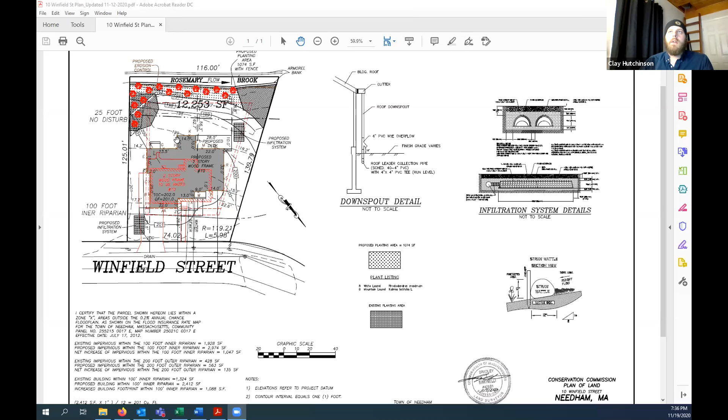So what was revised from the last iteration was simply that the addition here was kind of bumped out. It only came 3/4 of the way to the edge of the deck, and they made it flush with the deck, and brought a little wrap around up the stairs to the deck on the side. Aside from that, the same plantings, the same stormwater units, the same footprint — aside from that change it's all the same.

I'm just noticing one thing we try not to have happen is proposed grading sheeting onto an abutting property. So can we include, and the commissioners can discuss this, a condition of approval saying that the proposed grades, particularly on the north side, will not sheet flow onto the abutting property? It's showing right now that it kind of does, but I think there's enough room to fix that. We can have them submit a revised plan before we issue the order, and I can send it to you to review.

Okay, Rob, does that make sense to you? Yes, I don't really see that it's shedding onto my neighbor's property, because the property line on the north side is more or less a swale, but there's a fence going down towards the brook — it all sheds to the brook. So my question is, is this going to prohibit me from getting my demolition permit? No, I don't think so.

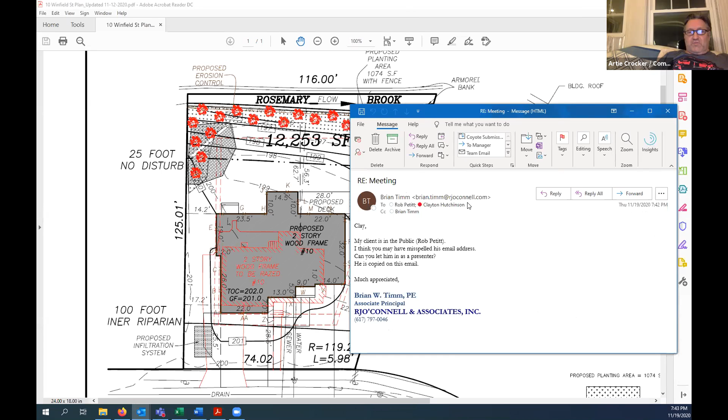Do you see this? Look at the plan closely and you will see it. What's this thing on the screen now, Clay? Clay, do you see what's on the screen? Right under the 130.79 mark, that is a swale.

You will see that, or is it? See how the contour changes? Yep. And it does follow down through to the lot to the 198 as well, and then 198 is also a swale.

Yeah, but right now you've taken this 199 and you've taken the swale away. I don't want to spend much time on this, but you've gotten rid of the swale with this grading. Yeah, we can adjust it.

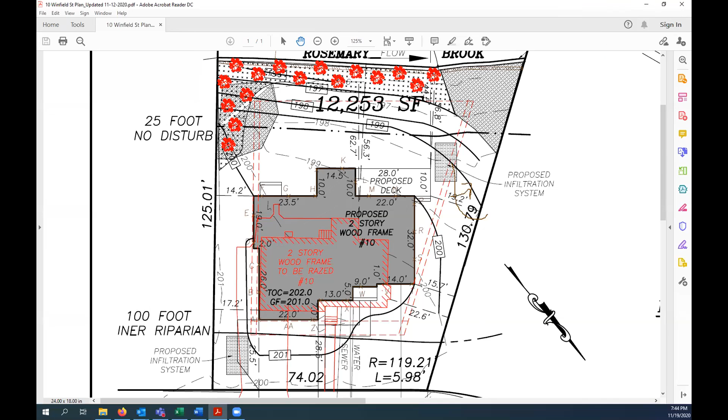So you want it to be able to go like this and not drain that way, you need it to drain this way. Yeah, you can make it happen. It's not showing that way here. So we're gonna want to make sure that an as-built plan comes back with this.

So, any commission members have any comments or questions? Artie? No. Allison, I just second what you said, Janet. Bill, no further comment. Peter, nothing to add. Stephen, no comment. Sue's still not here?

Okay, anybody in the audience have anything to add, ask, any comments or questions? There are no hands raised. Brian, anything else? No, Mr. Roach, anything else? No, I'm all set. So we have everything we need and we're ready to close this hearing?

Yes, looking for a motion. Motion to close the hearing. Artie, can I have a second? Second. Thank you, Steve. Okay, all in favor.

Artie, aye. Allison, aye. Bill, aye. Stephen, aye. Peter, did you vote? Oh, Peter, you moved. Okay, Peter, aye. I'm Janet, aye.

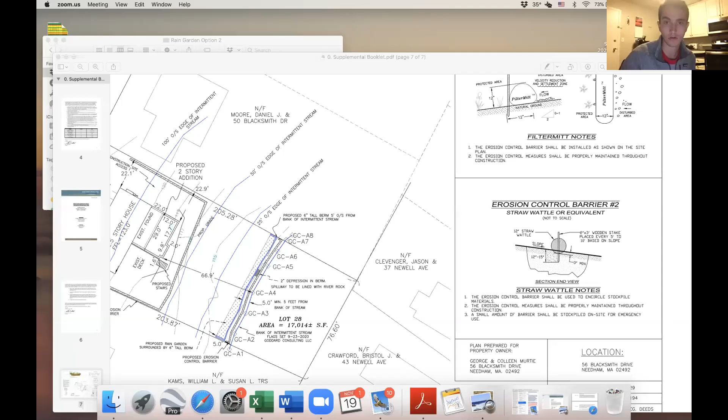Okay, so who's gonna present to us? That'll be me, I can share my screen, right? Yep. Let's see. All right, can everyone see that? Yes, see it. All right, so this is a continued hearing from the last meeting last month.

So the only change that we have is the relocation of the rain garden, kind of swale now. So originally we had two shown there, and then through discussion with you guys during the last meeting, we decided that probably something closer to the stream and going across the entire width of the property would be a better solution to capture the runoff from the proposed addition to the single family house here.

So that's what we have for you guys here. We went and offset 5 feet from the stream, and then we're gonna put about a 6-inch tall berm running across the entire length of the property there, and then curved up on the edges in order to create an area that'll actually hold water rather than letting it just run off the side onto the neighbor's property. Thank you.

So the idea here is we'll excavate down in here just a little bit, just so we can bring in some nice organic soil, so it'll function as a good rain garden where the plants will have nice soil to live in rather than just what exists there currently.

I had a planting plan and a construction plan that I put together. If you guys had the chance to look that over, I won't go into too much detail about how we're going to do it. A couple of other things I wanted to note.

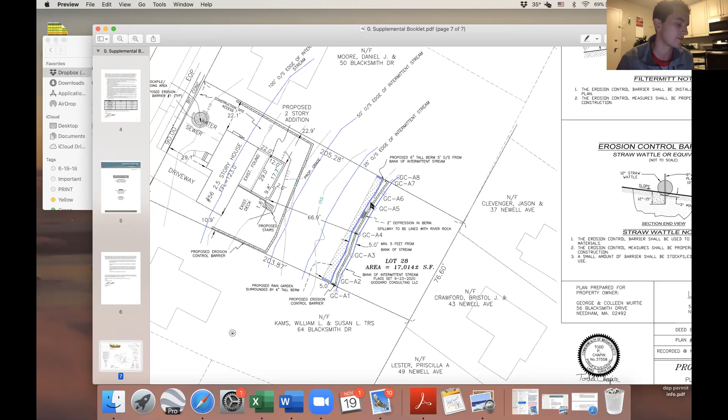And the swale rain garden, whatever you want to call it, is about 290 square feet. So with the 4-inch ponding depth, that gives you 96 cubic feet of storage, just to show you that it does meet the requirement of how much we need to be able to capture and infiltrate based on the bylaw. Good, thank you. At this point, it's just if you guys have any additional questions.

Commission members, Artie, I'm good. Bill, no further questions. Peter? Nope. Allison, yeah. Stephen? No comment.

So my only question is, and maybe this is for Deb, do they need to request something, because they're working within the 25-foot no disturb zone? Do they need to do a waiver request for the rain garden? Yeah, I think they should probably provide us with one.

It's plantings, so is that considered exempt? It's a little bit more than plantings, which is why I'm saying it. But we have that as part of a discussion later on tonight. But since it's more than just plantings, I would say we need a waiver request.

Okay, but typically, because it is more like a planting kind of thing, we would grant the waiver because it's sort of an exempt activity, and we recommended it, so. And we'll probably waive the fee as well. Right, yeah, we usually waive the fee when there's plantings involved, and that's the purpose of it.

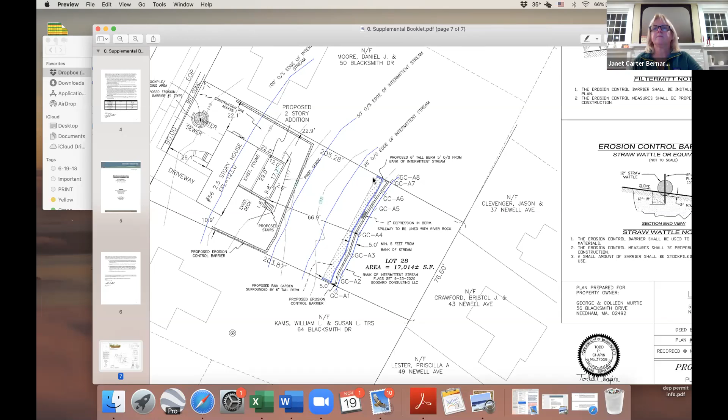All right, do we have any more questions from the board or the audience? You see anybody in the audience, Clay? There are no raised hands. Any commission members have anything else to add? We have everything we need to close this hearing.

Artie, aye. Allison, aye. Stephen, aye. Peter, aye. Bill, aye. Janet, aye.

So this hearing is closed and we will be discussing the order of conditions later on this evening. Okay, thank you very much.

We're moving on to 182 and 190 Edgewater Drive, DP file number 234853. This is a continued notice of intent. There's a number of people that might be here.

David and Stacy Necto. Yes, I'm here. Oh good, Wes is here. Yes, I'm here, I saw him earlier. Michael Crow. Saw him last time, he's attending the ZBA hearing, we are doing two meetings at the same time, so we've got the other computer going. Okay, I see his name here. Artie, you're here. Okay, so you guys are all here.

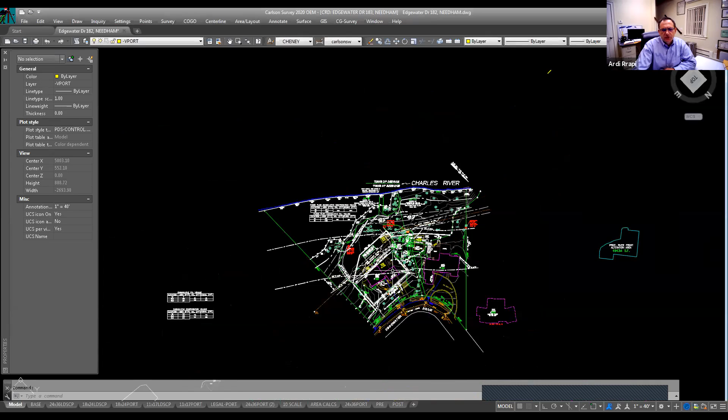I will start with a quick thing on my end, just so everyone is on the same page. We did the site visit together, let me share screen. So we did the site visit at our last meeting. One of the concerns that the board members had was that this tree, number 12 over here, was not marked to be cut. And because it was near the floodplain, it was requested that we identify that as the tree to be cut.

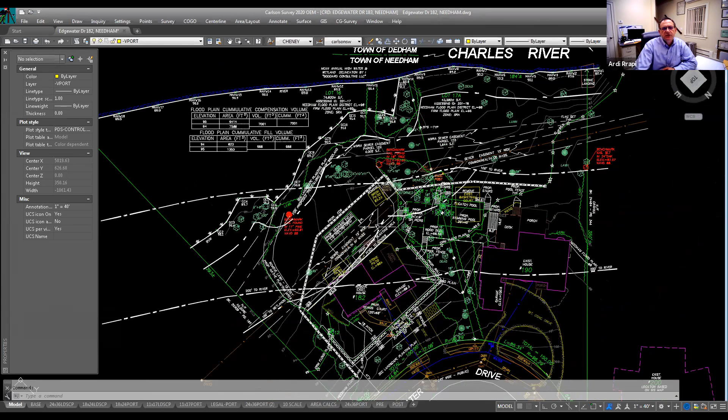What we did in addition to that is show all the trees that are impacted within 100 feet of the proposed pool area. One additional change we've made to the plan is that we've proposed a drainage field to infiltrate, the size of which will take half of the tennis court, including the 100-year storm event. We have provided the report showing before and after on every storm event, 2-year, 10-year, 100-year, including the rate and volume, showing we are reducing the size. And when it comes to compensation, we are providing 7 times more compensation than what we are filling.

We are still keeping the native planting swale or planting area on both sides. It was felt that the swale would be too deep to keep on the ground. That's why we ended up introducing the drainage field with a trench drain to pick up the water and infiltrate it. Other than that, everything the commission had requested, we believe we have complied with. Wes can go more into the details as far as what we are proposing for planting.

One quick question. I thought the groundwater was really high. Do you have enough separation for that infiltration system? We believe so, we can certainly do that. We haven't done testing on the site, but if need be, we can even put it under the tennis courts.

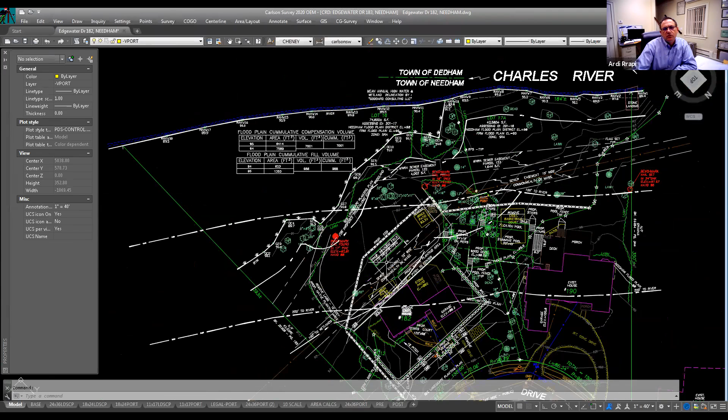It's that much higher? The tennis court is that much higher? It's not much higher, I can show you. So the tennis court, we're going to have it at elevation 94. And the ground over here is elevation 93, so this would be 1 foot higher. We did this to provide for compensation, but if need be, we can certainly raise the tennis court a bit more if needed.

We don't foresee that to be an issue, but until we dig the holes, we can go with smaller units if needs be, depending on what we find for groundwater. Have you done any testing out there?

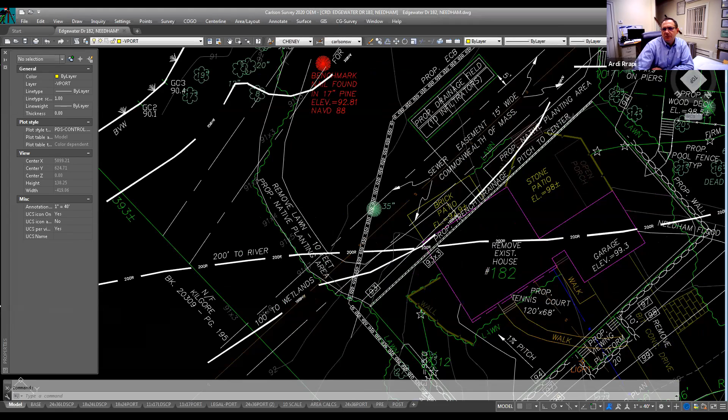Testing was not done because we were going with the trench. Originally, if you remember when we were proposing, we had a trench drain here, but it was felt that because we cannot plant significant trees inside that trench drain, which was going to be 2 feet deep and 10 feet wide in order to accommodate the additional impervious surface, the decision was made, rather than keep that as a trench, let's put infiltrators. We have not done testing as far as digging the hole.

David has not purchased this property yet. Our expectation was when they move forward with the demolition for the house - the reason why we're doing both meetings tonight with Conservation Commission and Zoning Board of Appeals is because hopefully we get the okay from you guys so that they can move forward and purchase the property. Once David owns the property, we certainly will go there and dig the holes.

Why are you in front of zoning board? We are in front for about 20 minutes. Or why? Because even though we are doing work inside the floodplain, and for doing work inside the floodplain it is an allowed activity for putting the swimming pool, you still require approval from Zoning Board of Appeals for doing it.

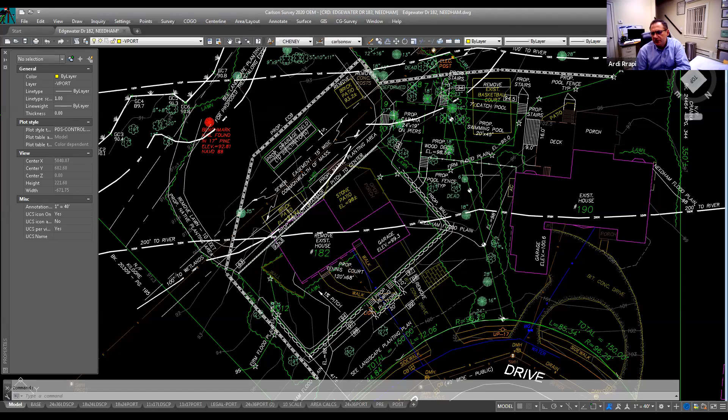Thanks. Bill, you have anything to add to that? No, only that the structures could significantly change with the results of the groundwater, so you'd be highly variable stormwater systems based on those results. Yes, and on our conversation with the owner, he understands the implications of getting the approvals - if needs be that we're going to make any radical changes, we will be coming back to the commissions for approvals if needs be. Okay, that's fine, no other comment.

Artie, you have anything to add, ask? Comments? Well, I'm waiting to hear what's happening with the plantings and specifically along the tennis court. Do you guys have something, the applicant, Wes? Yes, we do. Wes will take it from there.

I'll share my screen now. Can you see anything? Can you see what I'm sharing? Not yet, Wes. Share. Now we can. Good, almost. Okay, so there you go. This is a plan taken from - let me reduce it a little bit.

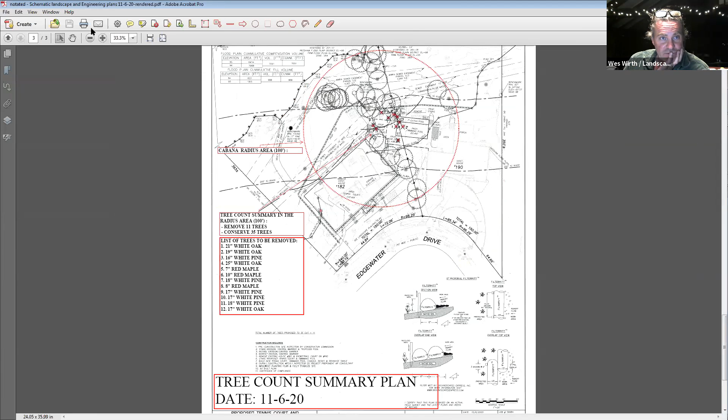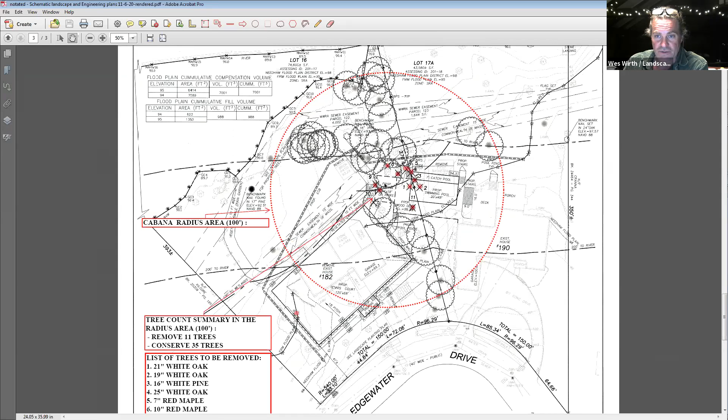It's overlaid on Ardi's survey drawing, which shows the trees that are being cut and the 100-foot radius that we talked about before, centered around the cabana. In this particular area there are the list of trees that we're cutting - there are 11 trees in that zone, plus 12, this one that's outside of there. And there are about 35 additional trees, which I've noted with the black tree ring, that are being conserved. So that answers the question as to the quantity of trees in that area for Artie on the commission.

It doesn't answer what we agreed to. I thought we agreed to, when we had the site visit, trees being planted between the tennis court and the river. Okay, I'm getting to that. So this was just the analysis of the trees that exist within that space. Okay.

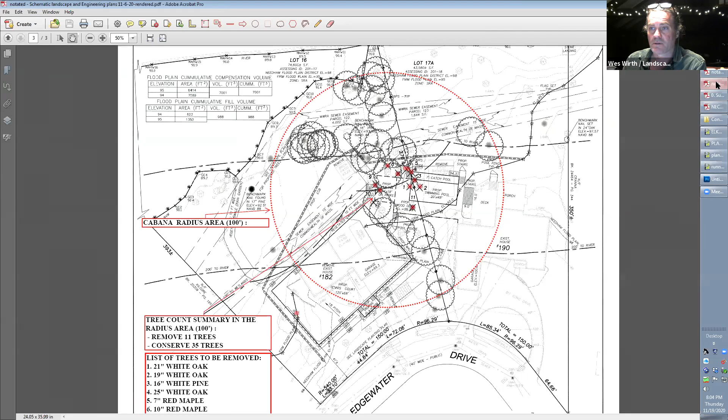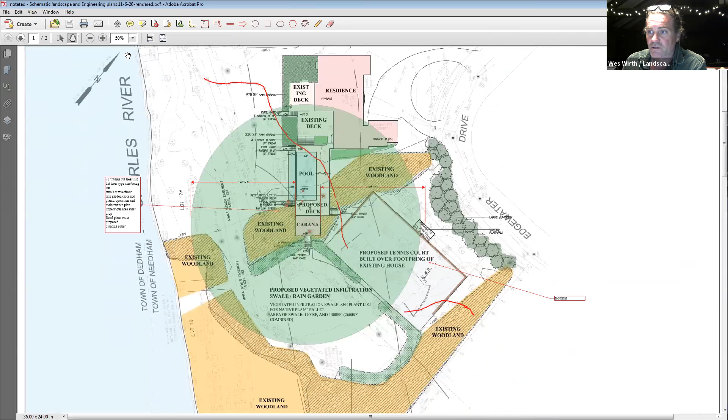So now to - actually, sorry, I have a whole lot of plans on here. That's not it. Okay, here it is. So this is the proposed planting plan and detailed plant list. What we're planning on doing is planting large trees right here, 3 to 4 inch caliper. You can see them up here. Where are they?

Quercus bicolor, which is swamp white oak - 6 swamp white oaks right here adjacent to the planting, and they would be 3 to 4 inch caliper trees, as shown in the plant list, 3.5 to 4 inch caliper trees. And then all the other trees - there are additionally 21 Thuja plicata cedars along the street, and all the other trees noted here, which are detailed in the planting plan.

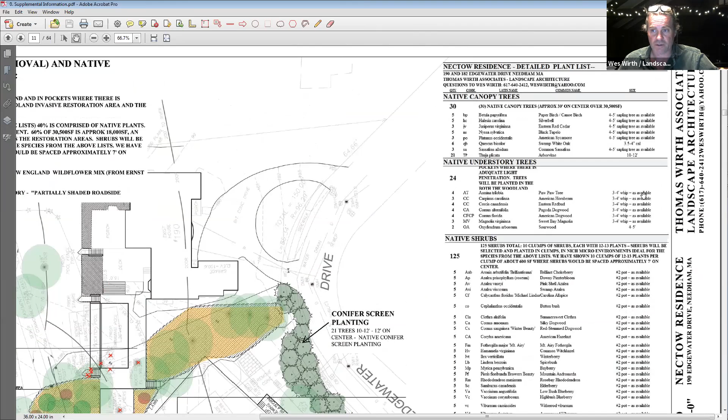30 native canopy trees, most of which are dispersed among the woodland, as listed here - those would be smaller 4 to 5 foot sapling trees. 24 understory trees, which are noted in the red from the species list with quantities and sizes, also 3 to 4 foot juvenile trees: pawpaw, hornbeam, redbud, pagoda dogwood, American dogwood, sweet bay magnolia, and sourwood. And then 125 native shrubs also from the list here.

Small pots, 2-gallon pots, or as available.

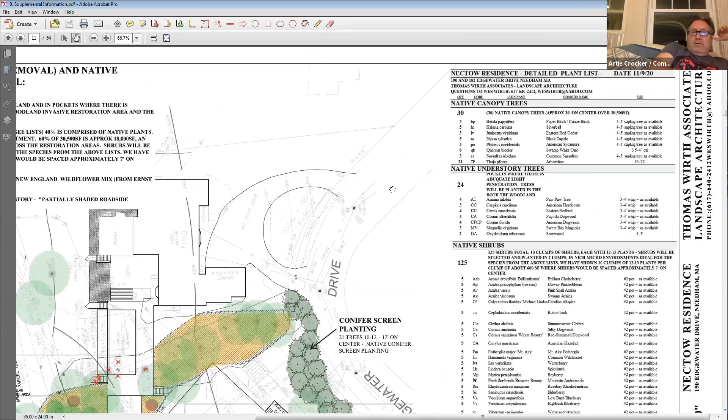Here's what I'll do: I'll give you the list, because it's a very diverse plant list. The overstory canopy trees we're proposing consist of 5 paper birch, 5 silver bells, 3 Juniperus virginiana (red cedar), 5 Nyssa sylvatica, 3 American sycamore, 6 swamp white oaks, which are the very large trees planted in the lawn, 3 sassafras, and 21 Thuja plicata.

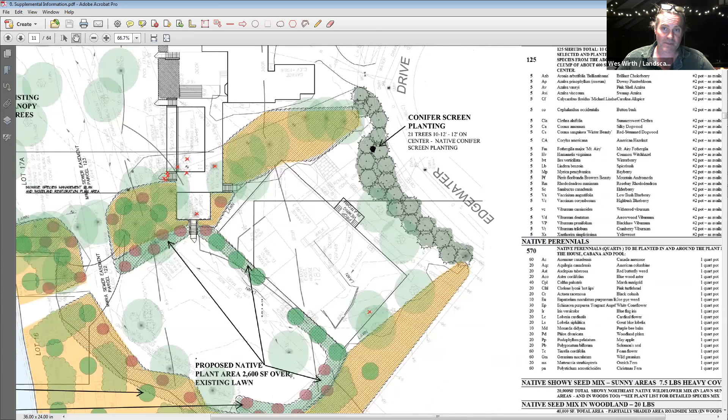The Thuja plicata are here. Those are screen trees, also large 10-footers. These are the swamp white oaks, which are 3.5 to 4 inch caliper, so they'll be about 12 to 14 feet tall.

All the other trees are noted in these green circles throughout the existing woodland zone, starting here, coming around here, and circling through the entire buffer zone area. They'll be planted in pockets, as noted on the plan, suitable to the condition of that particular tree. These are all native trees that I know will grow well in that condition.

Did you mention there were some invasives being removed during this same time period? Absolutely. This whole area, everything rendered in yellow on this plan, is quite inundated with invasive species. All of this planting would follow removal of invasive species and treatment as outlined in the invasive species management plan we submitted. The intent is to remove and manage the invasive species over an extended period of time, and to replace and enhance the native environment with these proposed trees, which I can go through further if you want to hear more.

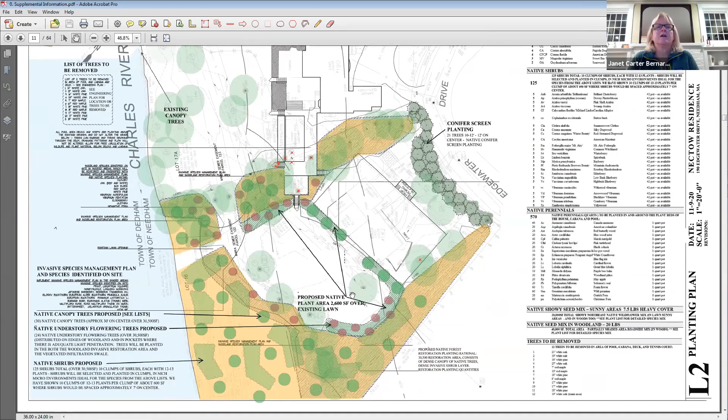Wes knows his plants. It's a very beautiful plant list. Thank you.

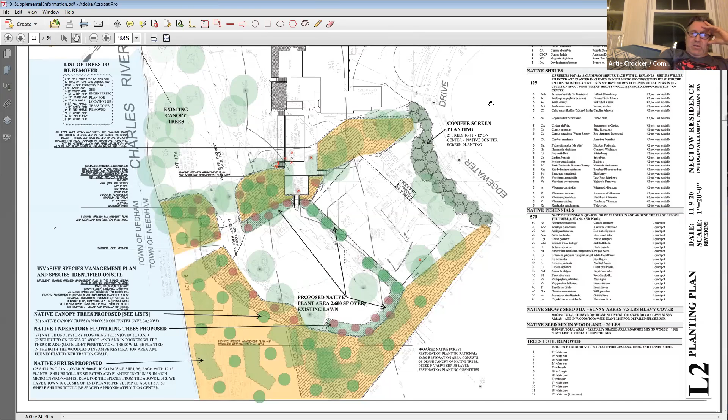Question about the white oak, was it swamp white oak? Question about the spacing apart, what is the spacing, and is that most appropriate for that species, or is it spaced that way because of the tennis court? I don't know if they're two different things. Actually, the tennis court is about 100 feet, so 6 over 100. They actually turn into very large trees, so they're a little closer than they would be if going for specimen, but they'll grow together and it'll be great.

And how far away are they actually from the tennis court? About 6 to 8 feet, something like that. Is that far enough away from the tennis court? Yeah. The intent was to provide shade to the tennis court, so you didn't want to be too far. You can have trees close to a tennis court, they just blow the leaves off when they fall on it. It's okay, it's not like a swimming pool. You don't worry about the roots or anything? No, not for swamp white oaks, no.

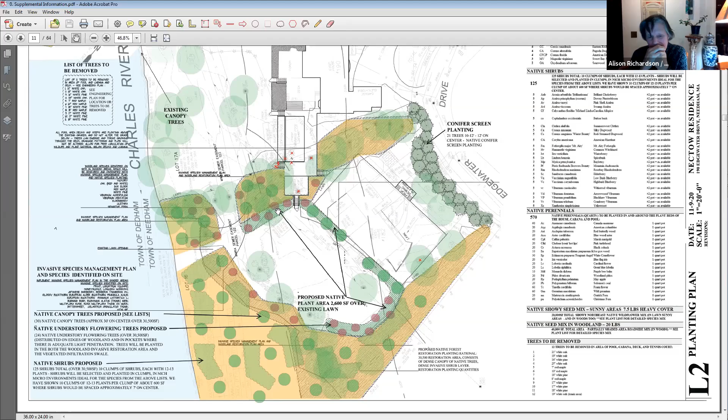Anybody have an opinion? I guess I should go down the line. Allison, do you have an opinion on if it's okay to do it now or later? I agree with what you want, I think it should be tested before they do it. But can we condition having it tested and having them come back before the tennis court? Yes, you really don't want to rip up that tennis court because you didn't tell us what the soil was like underneath it.

Arnie? Well, certainly agreed. To be honest, I'm not sure if the commission knew, but I certainly didn't know that you did not own the other property at this point. I thought it was actually already owned. So we're not going to know some of this information until you actually own it. I think it's quite appropriate that we know this information before. With that, is the homeowner's signature on the notice of intent, the person that actually owns it? Yes, it is.

Bill, you have any opinion about the soil testing? No, only that it's a significant risk with the buyer. My experience with soil testing is oftentimes you never know what you're going to find. You could be surprised with an outcropping of ledge, or surprised with a buried hole. So there's a significant risk that could significantly affect the costs of the project, but that's their risk.

So, Bill, if I may ask, we did run the drainage calculations for the drainage ditch. We know for a fact that we can do the drainage ditch, no question about it. So if anything, we can always go back to the drainage ditch. The cosmetics might not be as nice without that, but we know for a fact that we can get that volume. Even if we encounter water at 1 foot or 2 feet from the surface and cannot put the drainage field, we can go back to the first rendition of putting a drainage ditch, and that would hold the volume of water required.

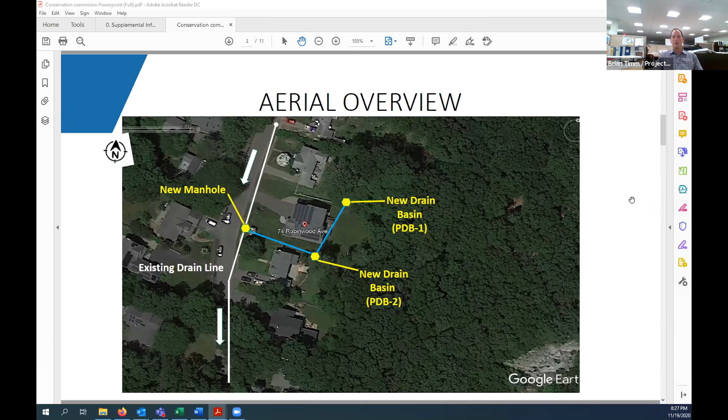Why don't we go to the next slide, or go back to the other one. Rich, if you'd like to talk a little bit about the wetlands. Sure, actually the next slide would be good for me. Okay, so if we can zoom in a little bit there, that'd be helpful.

So to the north of 74 Robinwood Avenue, you can see there's a lawn edge with a scalloped tree line, and basically there's a bordering vegetated wetland to the north of that lawn edge. It's behind the property next door, more or less. We call it a bordering vegetated wetland even though it's really limited to the land behind the property next door. It connects to a drain manhole, which eventually discharges the surface water from the wetlands to the stormwater infrastructure associated with Robinwood Avenue, which eventually discharges to another wetland somewhere. So a conservative interpretation is that it's a bordering vegetated wetland.

Between the two properties, just behind the houses, there is an isolated vegetated wetland. Brian, are the wetlands on this plan? As I look at this plan, the wetlands weren't delineated at the time I put it together. On the couple plans where we show the proposed work, I've colored them in, so Clayton can probably show roughly where they are. Or we could do a sneak peek of what the next plan looks like, and I can show you where the wetland is — it's about 3 plans ahead. Okay.

The green area represents the offsite wetlands to the north, behind the property next door to 74, and then the lower or bottom green area is an isolated vegetated wetland that just sort of circles on itself.

Can I ask a quick question? So you said the top one is a bordering vegetated wetland because it goes into the manhole catch basin, right? That's the connection? It's a conservative interpretation, sort of a worst case scenario. You could argue it's isolated simply because it goes into the manhole, but the water has to be pumped, which Brian's going to get to in a minute.

Basically the surface water that falls into the manhole has to be pumped up to eventually discharge to the stormwater infrastructure in Robinwood Avenue, which presumably discharges to a wetland somewhere downstream. I'm confused why one is a BVW and one is isolated, since they both seem to sit next to catch basins that go to the same place. The bordering one is inclusive of the catch basin. The isolated one to the south is offset from the catch basin. Okay, thank you.

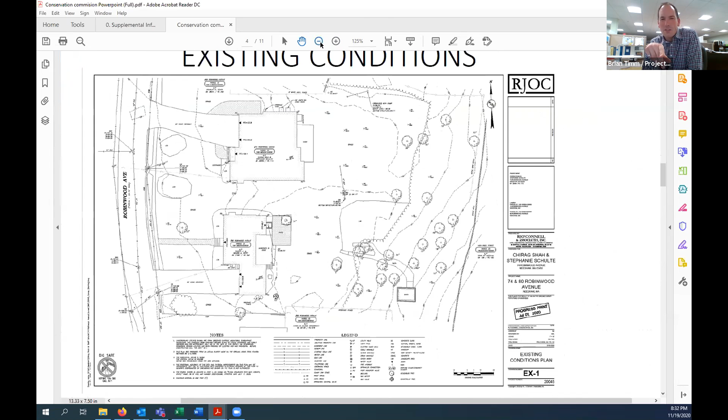Okay, thanks. Clayton, can we go back a couple pages? I think I'll be able to clear up what's happening here. One page prior, I don't know where I was. You were there, okay. So Rich talked to you exactly about where these wetlands are located. If you go to the next screen please.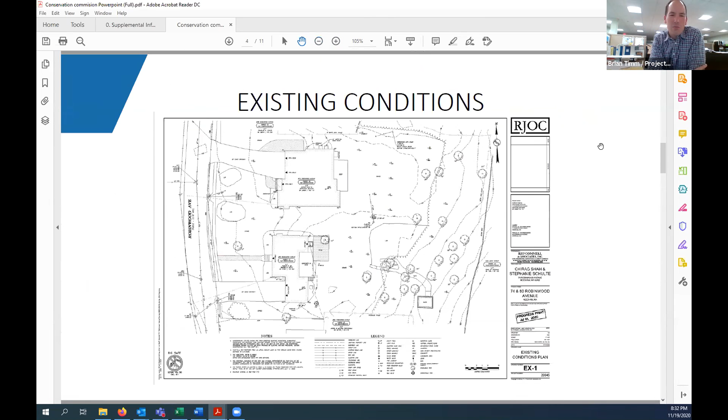So I took a couple pictures. I don't know if the whole commission has been able to go out there and take a visual of what they're looking at here. These first few pictures are of the property on the north. The first picture on the left is along the northern property line, showing the building at 74 Robinwood Avenue on the right; we're standing in the driveway looking towards the backyard. At the end of the white vinyl fence is essentially where the bordering vegetated wetland is located. On the right, I'm in the backyard of 74, the house is to my left, and I'm looking into the neighbor on the north, into what's the bordering vegetated wetland.

If we go to the next page, in that bordering vegetated wetland you can see a close-up. The grass is on the right, and you see that little rock-like structure, with an electrical outlet mounted on a 2x4 next to it. If you take that rock off, it's actually a faux rock, and underneath that is a grate. Water will flow into that wetland when it tends to pond up, spilling into the catch basin. The owner, Chirag Shah, has a duplex pump system in there that he has to change.

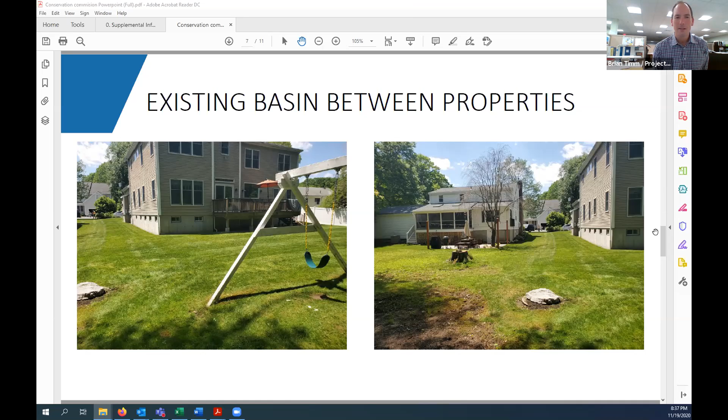The next picture, please. So here's, I know I talked about everything kind of from a high level. Now we can try to see it. And if you stay out far, I actually zoomed up on the next two so we can see it.

Again, you see, I think if you orient yourself, we have a drain basin up near that bordering vegetated wetland. I show a dark blue line. That's a proposed underground drainage line, two 6-inch perforated pipes at basically a 0.75% slope, less than 1% slope. There's two 6-inch pipes because you're not going to get a lot of flow in those pipes. So I want to make sure I have ample volume, and I have very minimal cover over what's there now.

We're trying to do as little earthwork as we possibly can within the 100-foot buffer zone. It's going to come to a center manhole between the two properties, bend to, as you're looking at on the plan, to the left, and catches, and it ties into the municipal drain on Robinwood Avenue, which is the light blue line. And then you'll see a couple little, I call them fingers.

They're little 4-inch perforated pipes. It's a little bit of a soggy, wet, backy, grassed yard. So the intention of that is to try to draw down some of that water that's sitting on the neighbor's land and put it down into the ground and promote, hopefully, some infiltration into the ground as well.

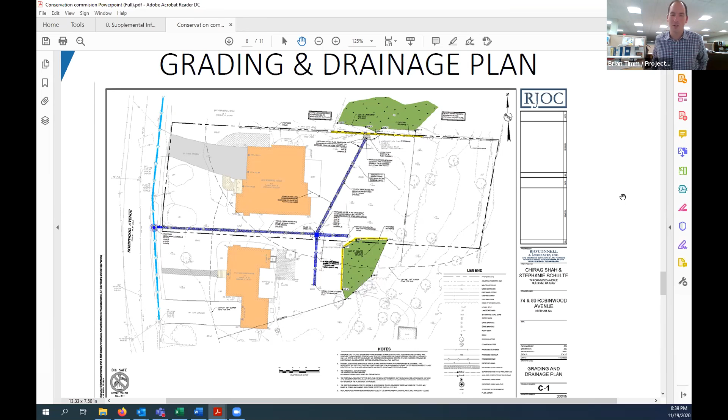So the next picture, the next slide, I won't get into too many details here, but this is a zoom up of the bordering vegetated wetland to the north. What's really important that I want to show you is you see the lines for the bordering vegetated wetland, BVW 1, 2, 3.

Wetlands are to the north. Then there's a little circle above BVW-3. That's the existing catch basin with that initial rock that I showed you. You can see it's actually in the wetlands. And what's important, you can see the label on that. The rim is at 98.3.

So we're proposing, and that's off our property too. Property line is that bold dash line. So what we're proposing to do is put a new catch basin in, or drain basin, at elevation 98.9. So it's actually higher than what the existing basin's doing.

Water's going to pass through a stone check dam, basically to filter out any leaves, debris. I don't want this 6-inch pipe to clog at all. In fact, Chirag and Bob are probably tired of me telling them that you're going to need to maintain this system when it's installed, with rapid flow or just jet cleaning it to make sure the sediment doesn't build up in it. It doesn't have a lot of pitch in it. But essentially, it's 2 6-inch pipes flowing down on the property towards 80.

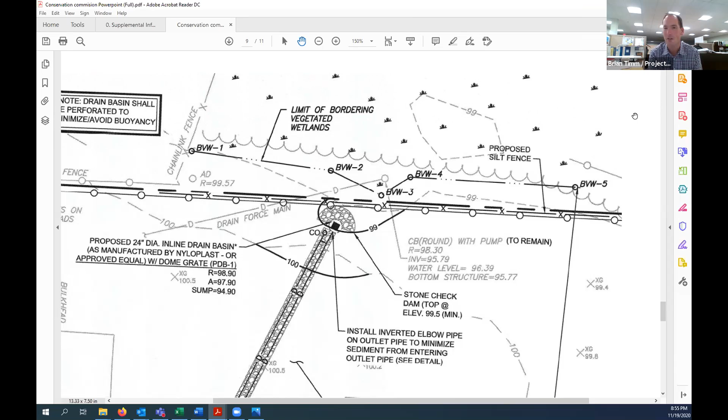If we go back to the other picture, it's hard to see in the backyard because I didn't zoom up on it, but there's a small area. The adjacent property, which is kind of part of this also, has a swing set in a playground and some trees. I don't know if you have a photo of that tree, but when I was out there, they had cut a tree down.

They asked us, they came to us, we said keep a snag. So they cut it and they have a big planted pot in it. That was us. I was really quite impressed that they kept to that, we didn't want them to cut the whole tree down. They kept a portion of the tree and made it a big flower pot. They are also trying to make sure it's not going to flood over their property. The whole thing seems to, that's what I heard, is that it all kind of fills up.

Hey Janet, this is showing the 100 though. I'd like to get some clarification on the existing catch basin, let's call it, which has the downspouts going to it, which is now in the middle right-hand area, but a few feet away from the wetland. What is that line going from the new catch basin area to that area? What is that hashed area about right there?

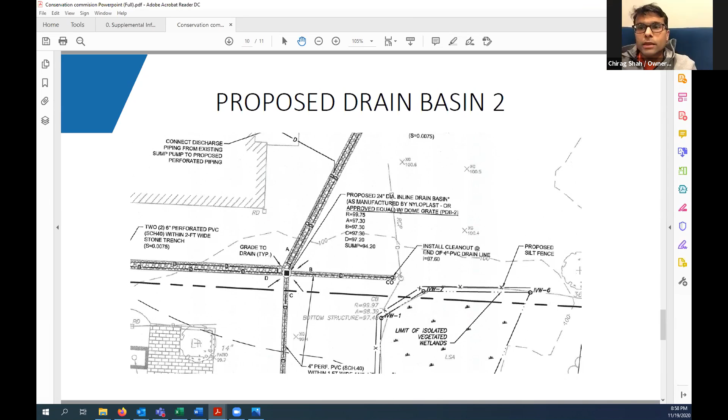There's a little pond right before the rail trail, so it kind of collects into a pond. If you're walking down the end of Robinwood, you keep going straight into the forest there, there's a little brook on your left. That's the brook from that drain. And right before you get to the rail trail, because the railroad right of way is up, there's a little pond area.

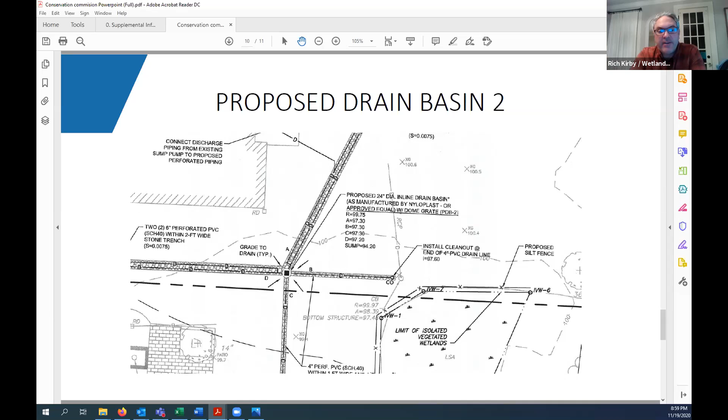If I can share my screen, I can show you the MassGIS aerial and the USGS topographic map, which shows this. Can we see that?

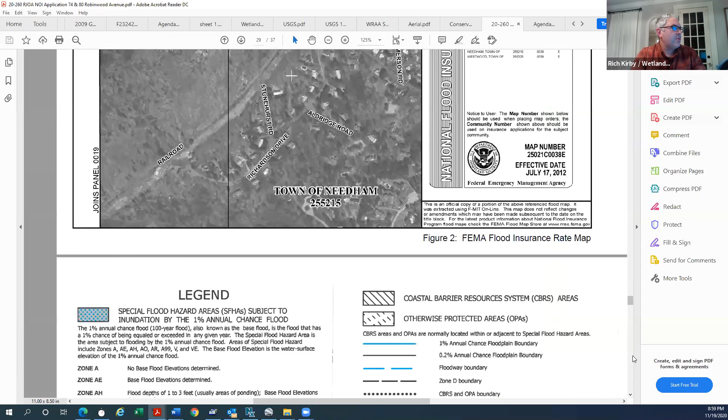Here's the FEMA map, which shows a black and white depiction of that. This is the pond down here, and there's the railroad.

So commission members, Allison, do you have anything more to ask? Yeah.

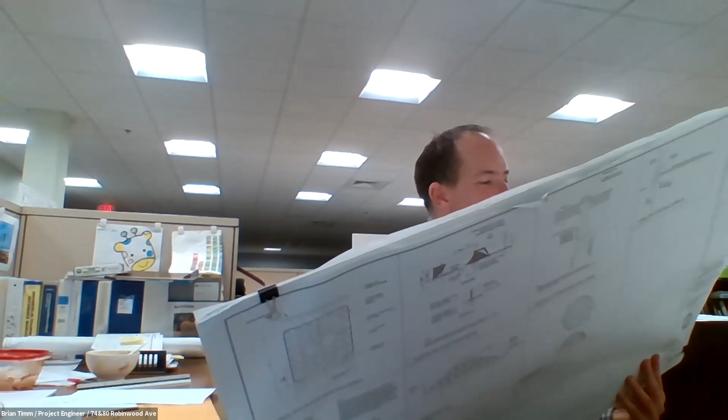Sure. The elevation of those, where we're connecting, is 96.3. I don't know if you want to bring up the pictures if we're going to do math here. No, but that elevation's already set. Is it going directly into the drain, or is it going into a grate or catch basin? No, I'm creating a structure there, so I'll tee into the existing main, basically.

I'm just curious to know if those pipes at any time fill up with groundwater now and might not be effective. The fact that my survey crew was able to pick up the inverts of those in the structures leads me to believe that they're not submerged in water.

Only being that I know sometimes they wouldn't, if they see water, they're not going to go digging for a pipe underwater. But if you're trying to get a gravity from the back to the front, will they be put at a higher elevation than the ones that are there now? Slightly higher? About the same, I would think. About the same. Minimum pitch?

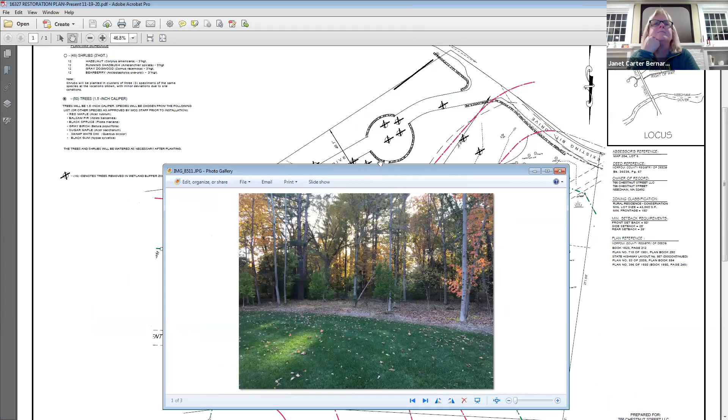Can you see this photo? Yes. All right, so this is looking... can you make it bigger? Oh good, yep, thanks. Can you also see the plan underneath? Yep. So this is on the west side.

If you're looking through here, it goes out to Chestnut Street. So the trees and shrubs that were planted would be through this area here, where you see trees already planted, but we've put a number more into this area here, and further towards what will be Heather Lane along that edge, and more towards the other property line. I wanted you to see what it looks like.

And I'm going to look to the other side. This is the garage side. The garage is up in this area here.

This is what's out here now. So the trees would be in this area through here, up around towards the garage, and through the front of the lawn over here.

Okay, Allison, have you had a chance to look at these? It's been in front of us a few times now, but... well, I'll try to get the right plan back.

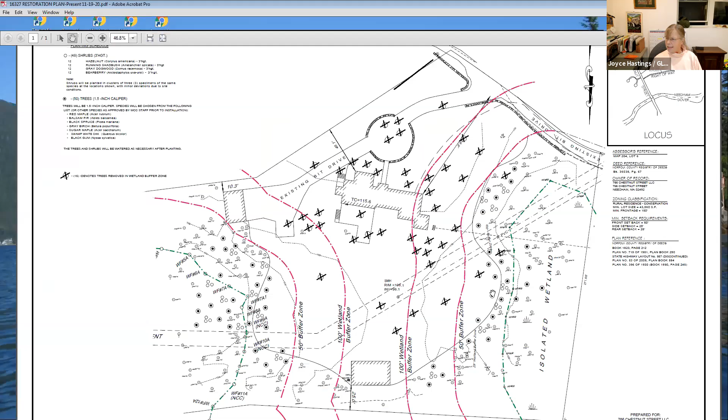So my planting list is to the side. The dark circles are the trees, and the light circles that don't have the...

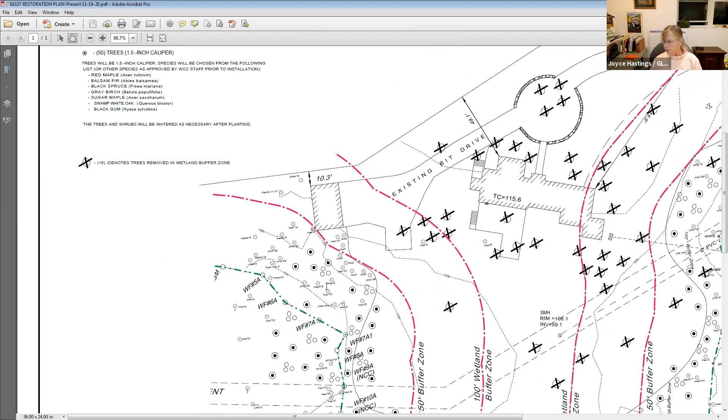I don't hear you anymore. Okay, yeah, so the ones that have the little dots that are labeled are existing trees, and the plain circles are...

Shrubs. The only issue I have is bearberry is so tiny and it really needs to be in the sun, and it's really a ground cover. It's not really a shrub.

We'd be happy to change that if you'd like. I think you might want to change it to something else, witch hazel or something that will have more of a chance of living up higher. You could pick a native shrub that's in the... Sure, I'll pick two more shrubs and take out the bayberry. Okay, it's not bayberry, it's bearberry. Bearberry, yeah, it's lovely, but it's literally this tall.

It is small. So is the existing edge of lawn this kind of solid line? It's this circuit, this line right here. Yeah, the snake-like line. And the trees that were removed are the X's. So those are the X's, yeah.

There are no trees that were removed within that 50-foot buffer between the BVW, and there are no trees removed in there. There's one tree over here. That's the isolated vegetated buffer. Yeah, the other side, no, there's no. There were no trees in there removed. Nothing that was taken out. Okay.

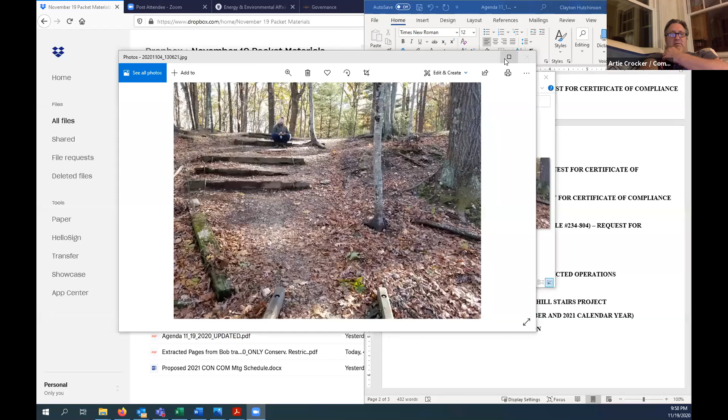Weren't those stairs originally talked about someone fixing them like 3 or 4 years ago? Anyone remember that? I thought something had already been mentioned about that, someone fixing it back then. Yeah, there may have potentially, but it did not come to fruition.

My proposal would be, obviously the scout, since it's the Swamp Trail and there's wetlands down at the base of this, they'd have to come back before you to have approval of their plans before they move forward anyway. So you would get a sign off on the design and the methods and such. As you can see, there's a lot of erosion that comes down, and it's to the point where there's a lot of gravel and stuff that washes onto the actual boardwalk itself.

These stairs are pretty much rotted through, and there's nothing, no water bars or anything to prevent the flow of water coming off Esker Trail.

If the commission is comfortable, I'd like to move forward with finding a scout who is confident they can get this done and has the resources. They'll have to do their own funding and sourcing of materials before they start. I'll hand them a copy of the AMC Trail Building and Maintenance Guide, a great resource with best management practices for trail design, water bars, addressing erosion, and creating stairs similar to those photos. But it's a big enough project, and if we inherit something, I want to make sure the commission is preliminarily okay with this as a scout project.